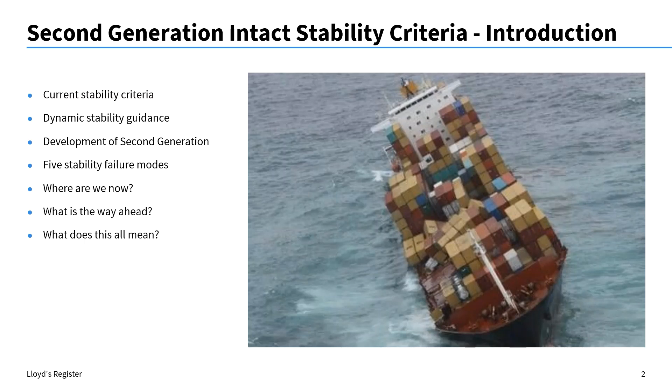The first generation stability criteria very much came from the historical development of stability criteria, starting with a gentleman called Rahola in the late 30s, then moving through the 60s to the development of the first set of defined stability criteria at the IMO. The principles of this first generation criteria, which we as naval architects and other engineers are all familiar with, are that the waterlines are level, there are no waves considered in the analysis, and because of that the vessel is static, giving an unchanging righting lever, or GZ curve, that we'll all be familiar with.

And then crucially, for a given loading condition, this means that the righting lever or GZ curve is singular - there is only one. If you would like more information about the historical development of the criteria at the IMO and the development of what is now the IS code, please take a look at the explanatory notes and references on the slide.

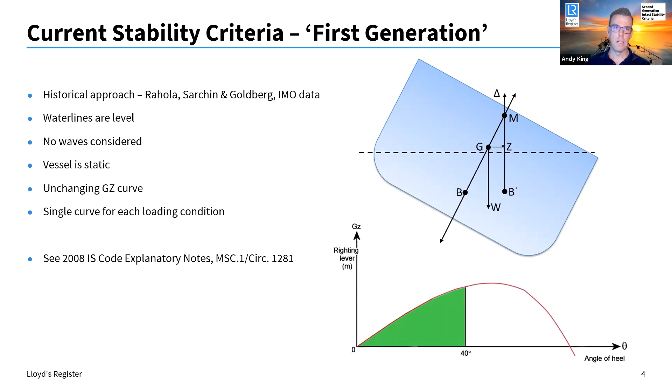Hopefully you haven't missed any content, but I've just summarised the historical development of the first generation criteria. Now, crucially, what is excluded from that criteria is any form of dynamic behaviour of the ship in waves - the variation of the righting lever that comes from a ship in waves - and what is given is only simple textual guidance. There is nothing more substantive in the stability information booklet or any other guidance to the master on the vessel other than what takes up maybe a chapter or two in that booklet.

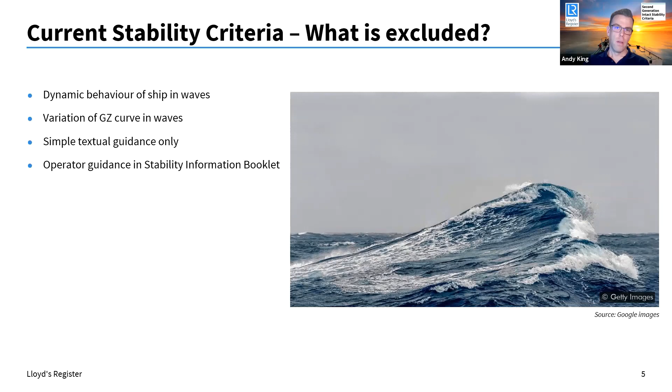The existing guidance can be found in Part A of the 2008 IS code, and it gives just precautionary provisions - some high-level textual awareness of these phenomena. It gives the ambition for performance-orientated criteria, but none are given. So there are simple headings for righting lever variation, resonant roll in a dead ship condition, broaching and other manoeuvring phenomena, but there is no substance to it, just a line that was written with the hope that those chapters would get filled in.

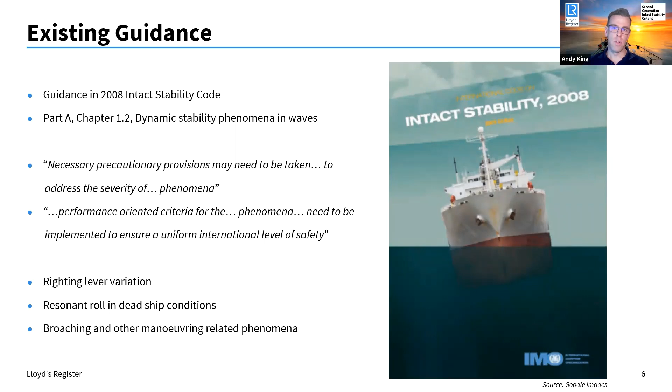Well, now they can with what is called the second generation stability criteria. So we've seen where it's come from over the last 70, 80 years, and now where we are with the state of the art of the next generation of what's to come.

So let's look now at how it's been developed. The work has been ongoing at the IMO for several years, and I heard anecdotally that it's been one of the longest running agenda items at the IMO. It's taken a substantial amount of work.

So over that time, the criteria have been developed, and there has been a large number of sample ships analysed, including a large variety of ship types. The draft criteria, as of now, have all been agreed, and we are currently undertaking the work that will finalise the explanatory notes. So a key point is that initially, this criteria will be non-mandatory.

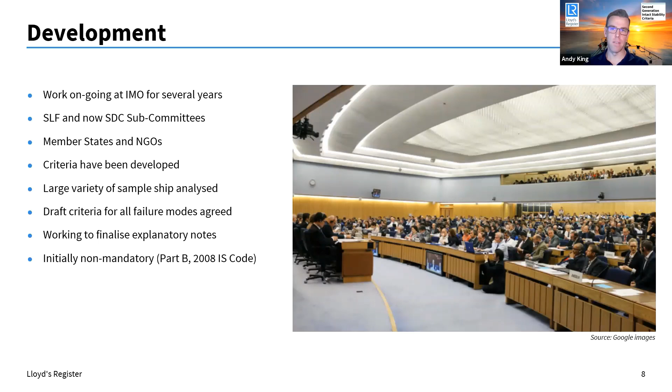In terms of who has contributed to the work, it has been taking place in an intact stability working group, expert group, and then intersessionally - and by that I mean between the annual meetings of the IMO, which is generally around February time. So intersessionally, there is a big correspondence group where the intact stability experts can debate and refine things by email and by phone.

The work, by its nature, has been highly academic, and this is because, as you might appreciate, we're trying to distill very dynamic stability phenomena into, in some cases, very simple binary pass-fail criteria. So on that basis, because of resource, computational ability, model testing ability, etc., it's been largely led by universities, and principally led by Japan, the United States, Italy, and Germany.

There's been valuable contributions from many other member states and NGOs, for example France, Sweden, IACS, and ITTC, to name many. And then the software development insights have largely come from the Finnish delegation, which has been most helpful. And then even other delegations, such as the UK, Norway, and others, have given practical views on implementation, on approval, on complexity, and contributing to that feedback process.

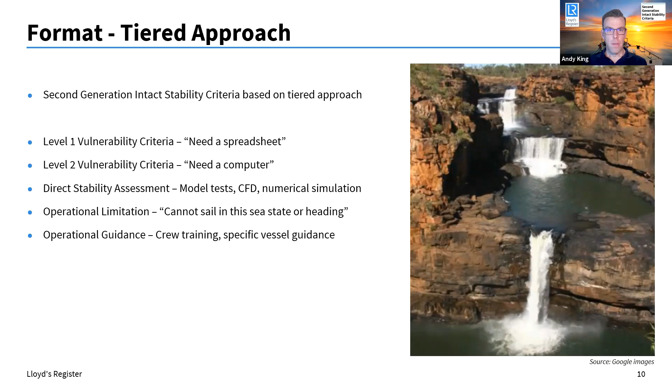If you are vulnerable, i.e. you don't comply, you move downwards to level 2, and downwards and so on as you pass or fail each mode. The key thing is, as a designer or as a consultant or whoever you may be, you can enter that left-hand side on any tier.

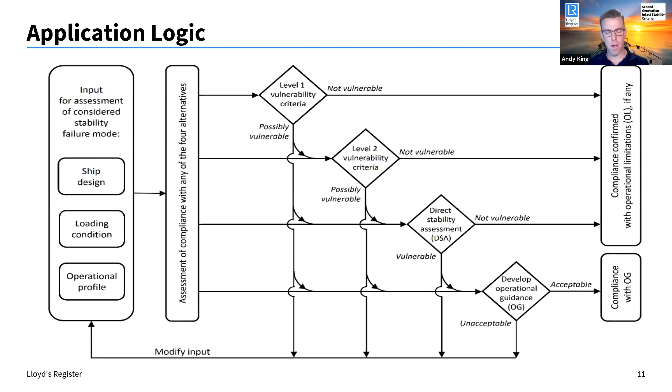If the vulnerability criteria are not complied with - very much prescriptive criteria, pass or fail - then you must move forward to the direct stability assessment method. This is largely a choice of model testing or numerical simulation, or a combination of both. It's key to say that it's much more complex, and much more resource and time intensive than doing the binary pass or fail checks in level 1 and level 2.

But the intention is very much to balance complexity against practicality, and the latest technology and software that's available. The safety level achieved by passing or failing at this stage is all about a defined average stability failure rate, and the numbers and background to that are in the regulations. In those, I should say, guidance is very much the requirements for how you do this work, the procedures you would go through, and how you would validate your work as well.

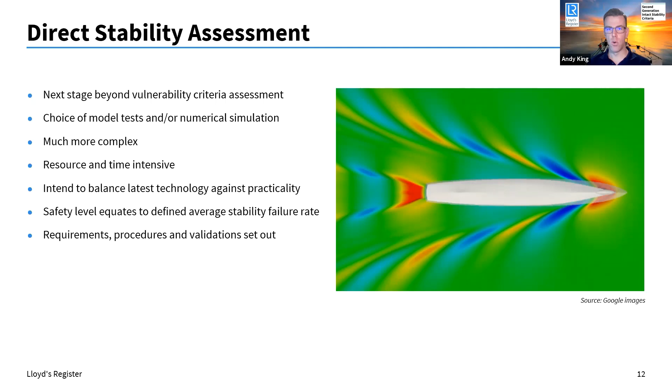If you did not comply with the direct stability assessment, having been through the entire process, and it was not possible to modify your ship or loading conditions, or any other parameters for compliance, you might then consider operational measures. As I mentioned, that is a blend of operational guidance and operational limitations.

Limitations limit the operation in a given loading condition. Operational guidance is a set of instructions for the master, such as speed and headings that need to be avoided. The limitations may be on areas, routes, or season, or significant wave heights that need to be avoided. But as you may appreciate, in real time on board the vessel, this requires detailed weather forecasting, wave information to be known, and careful consideration of how that is presented to the crew.

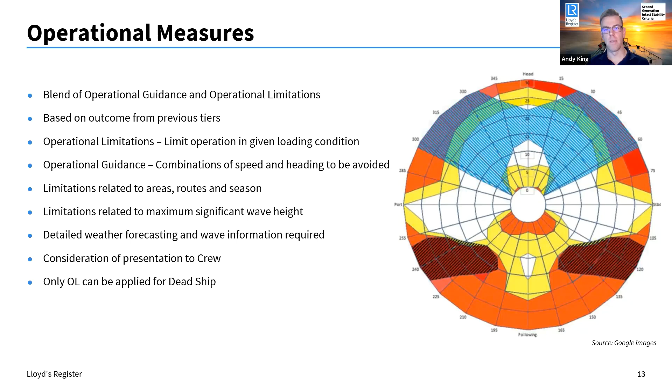Just one final point to note - when we come to the dead ship failure mode, which is about a vessel with no power, we can only apply operational limitations to such a case. When a ship has no power and loses steering and propulsion, then no amount of operational guidance in the first place may prevent a machinery failure from happening.

The substance of the criteria is considering 5 key stability failure modes: parametric roll, pure loss of stability, surf riding and broaching, dead ship condition, and excessive acceleration. We will look at each one in turn, what causes the phenomena to take place, and then where applicable, look for an example and a video of the phenomena in action.

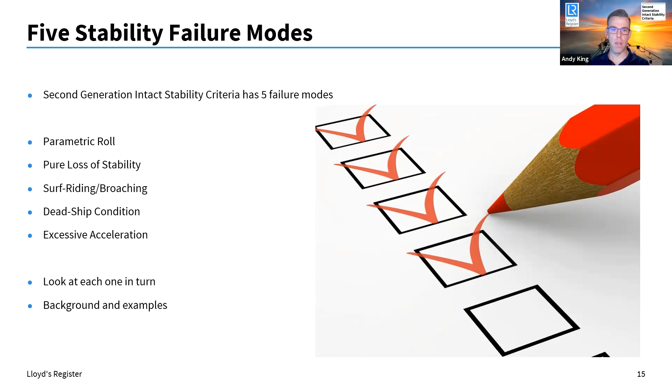Let's take the first one, parametric roll, and look at the background to it. It's caused by a variation in the righting lever, when the vessel cycles between being very stiff and very tender as waves pass along the vessel. It typically happens in following or quartering seas, when waves come from towards the bow or stern quarter, typically when the wavelength is approximately equal to the ship length, and when the encounter period is approximately equal to half the natural roll period of the vessel.

This phenomena, like many of them, is very sensitive to hull form and lines. Vessels that are very full in the mid-body and very fine at the ends, such as passenger ships and container ships, are particularly prone to this. You can see in the image a wave passing along the vessel, and in the plots below how the waterline - the red dotted line is the still waterline - but the light blue line is that waterline as it traces the wave trough and then the wave crest at amidships. As that wave passes, that crest goes up and down, causing the cyclical changing of the righting lever. These images are taken from the explanatory notes, so you'll see them in the regulations when they come out.

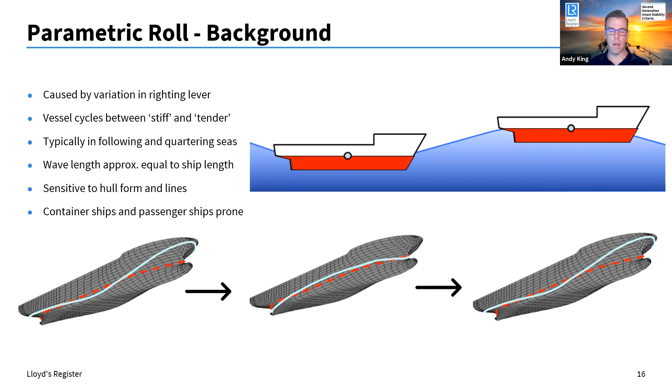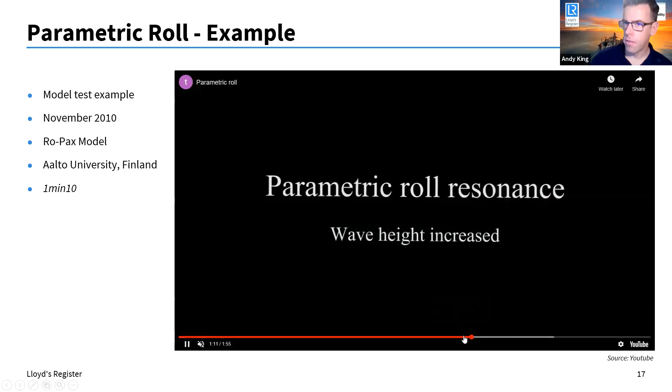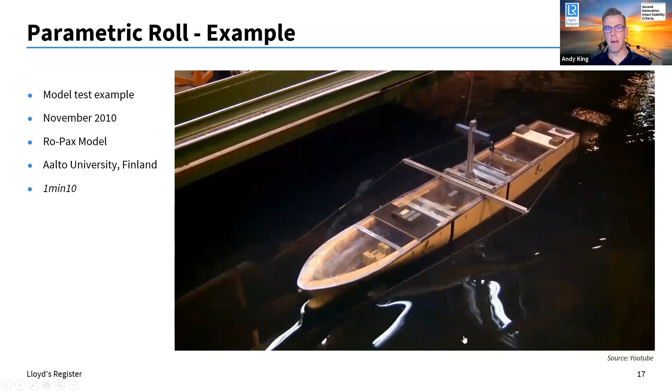Let's look at an example of parametric roll in motion. This is a model test - I'll jump forward and let us watch about 20 seconds of video, taken from YouTube, so it's publicly available, of a ro-pax model at Aalto University, Finland. You can see a very full mid-body, very fine bow and fine stern. As the head seas pass along the length of the vessel, the motion starts building up such that you get this natural roll building up that gets quite extreme towards the end. That is parametric roll in a model testing environment.

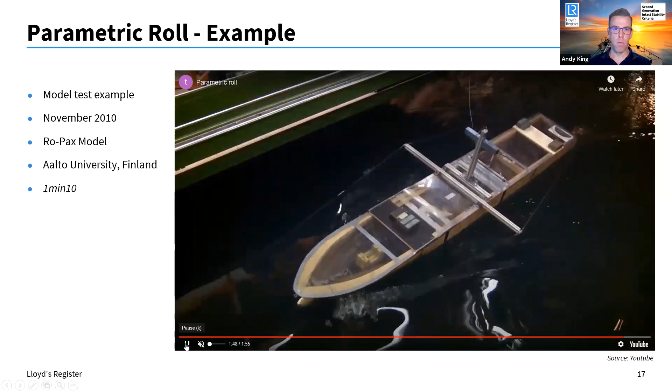In a real world scenario, we may look to a vessel called the Pacific Sun. It was built in the mid-80s, just under 200 meters long, and was LR class at the time. It's important to say that the loading condition the vessel was in complied fully with the normal, first generation intact, as well as damage criteria.

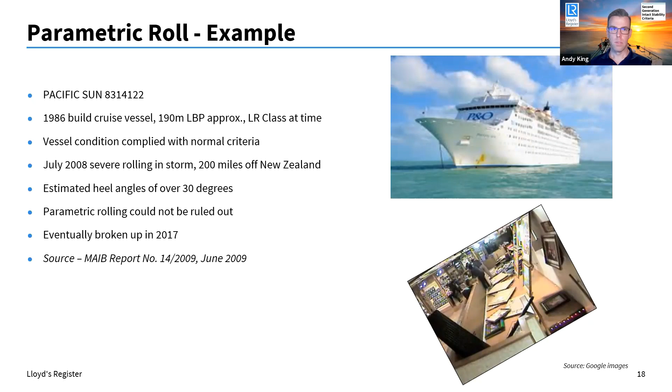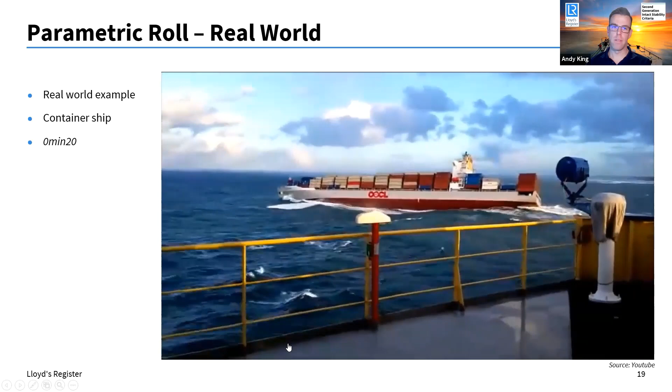Another real world example of parametric roll is this container ship, filmed from the bridge of another passing vessel. You can see very quickly the vessel starts building up some very large motions. It's worth remembering again, thinking about hull forms and lines - very fine fore and aft and very full in the mid-body. You can see the kind of heel angles being achieved in that situation.

As the vessel gets caught on a wave crest and sustained there, you may get a negative GM, and that's what can cause pure loss of stability, and in the worst case, a capsize scenario where all stability is lost.

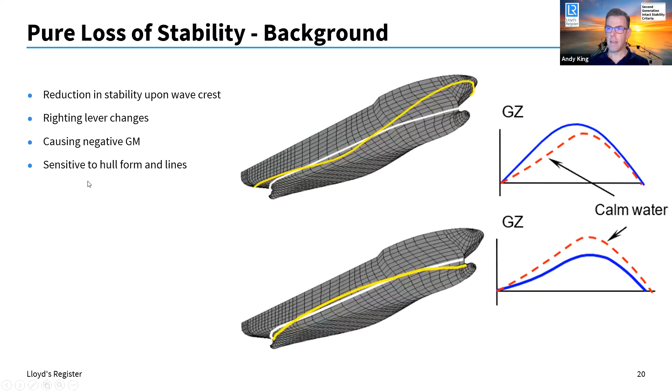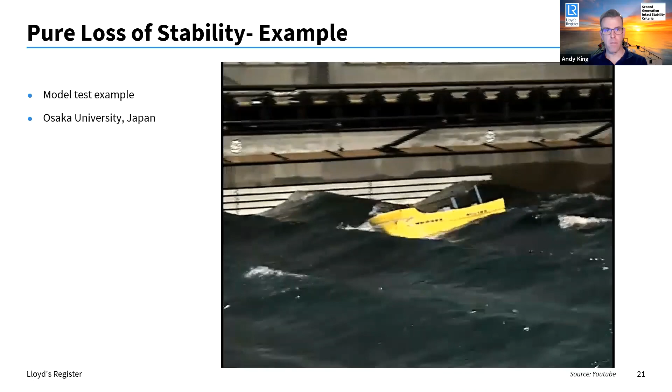Let's look at a model testing example filmed in Osaka, Japan, Osaka University being key because the professor there is the chair for this work. You can see the vessel gets caught on the wave crest, loses stability, and over she goes.

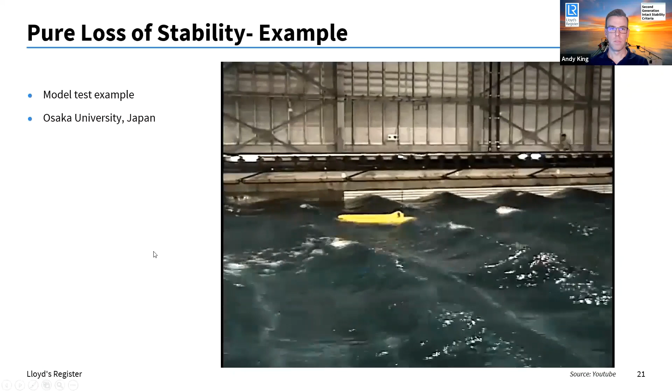A real-world example of this phenomena is the Ariake, a 1995 RoPax vessel, 150 meters in length. She experienced a single large stern quartering wave in bad weather, hitting exactly what was required for this phenomena: a wave length roughly equal to ship length, giving an initial 25-degree heel. She was then hit by a second wave, which with sustained heel angle gave rise to cargo shifting.

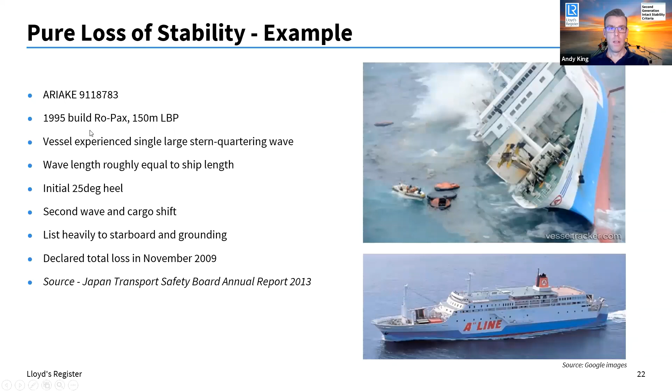The third failure mode is called surf riding and broaching. It's a highly dynamic event, subtly different to pure loss of stability. It gets initiated the same way, with a vessel caught on a wave, but then the vessel gets sustained on the downward face of the wave, such that it is essentially surfing with the wave, hence the first part of the name.

Then the broaching event happens, when the vessel becomes unstable in yaw. There is no control due to the flow direction on the rudder being reversed from the rotation within the wave, and then the vessel can broach sideways and lose stability and control.

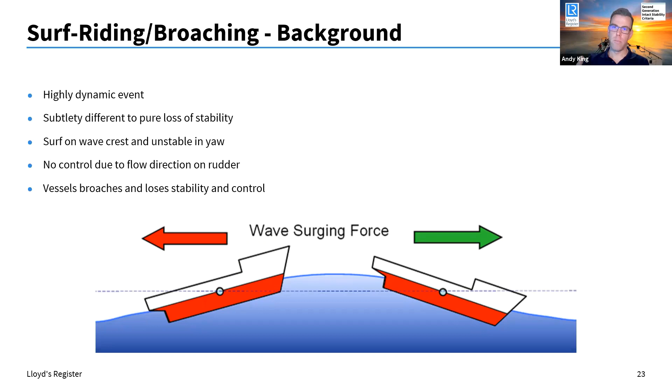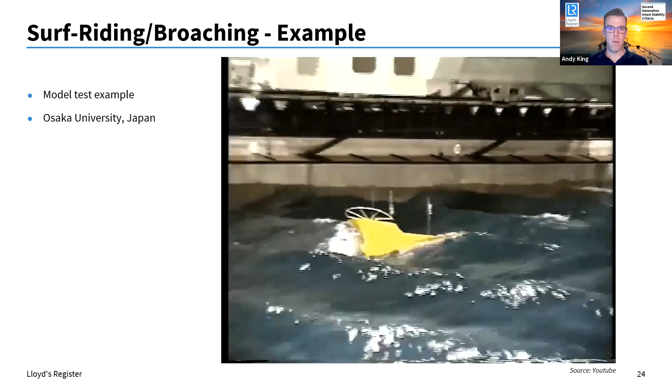To visualize this further, we'll look at the same model test, same hull form, same model. You'll see the vessel surfing with the wave, getting caught on that downward wave crest, and then it broaches, loses control, and turns over.

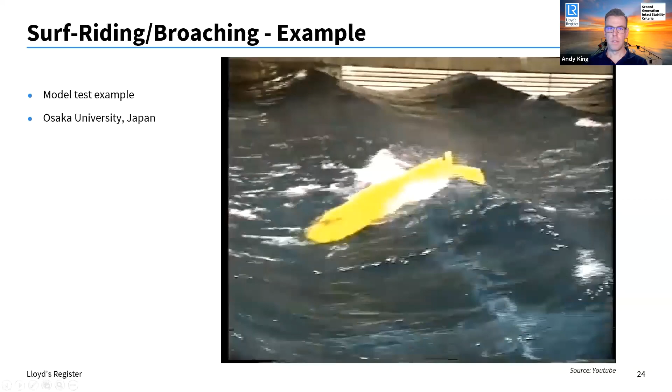The fourth failure mode is called the dead ship condition. It's the simplest to visualize, but one of the most difficult to model for the criteria. It's largely developed from the conventional wind criteria, and means, as the name suggests, the vessel has no propulsion and no steering, so it essentially turns beam on to the wind and waves and starts reacting to that wind and wave action.

It's important to state the work with the conventional wind criteria was so in-depth that it's my view it will eventually lead to a refinement, a development of what we think of as the conventional wind criteria. I do not have any examples of this, real or model testing.

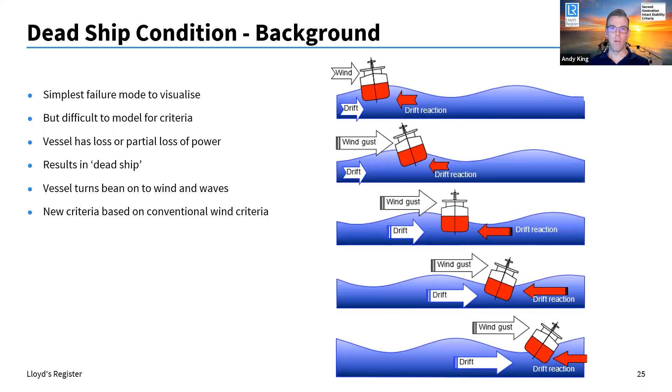We'll move on to the fifth and final failure mode, which is excessive acceleration. It's generally good to have a low center of gravity for stability reasons, but having a low VCG can make a ship very stiff, and that stiffness can give rise to very rapid accelerations.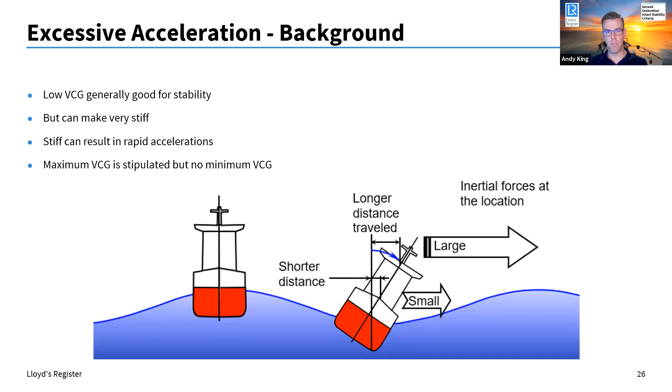A real world example of this phenomena was on board the Chicago Express, a very large container ship. It was GL class and German flagged, and that's important to state because in this case, the German delegation at the IMO was very much the driver behind the inclusion of this failure mode in the criteria.

She was just off Hong Kong when she was caught in heavy wind and swell, giving very high roll angles. She was hit by one single wave on the starboard side that gave a roll angle of 44 degrees. The vessel was in a ballast condition, and the motions were so extreme and so fast at the bridge level that everybody on the bridge, other than the helmsman, were knocked completely across the whole width of the bridge, unfortunately leading to one fatality.

The master was very seriously injured, and also 4 minor injuries. But just like we were saying, the vessel had a very large GM, a very low center of gravity. So again, it's about thinking about that window of operations where the VCG might sit. And again, you can find at the bottom the investigation report if you wish to find out more.

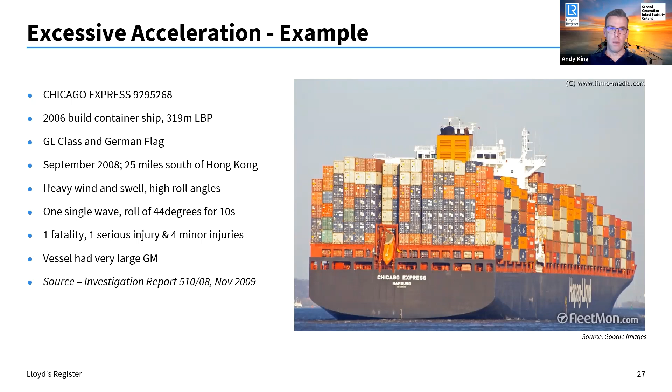So those are the 5 failure modes.

So let's think about where we are now and what's the way ahead with this criteria. The key point of this year, just before COVID hit us in February 2020, was that all the vulnerability criteria and all the draft guidelines for the criteria were agreed at IMO. That happened at SDC 7.

And then also the draft guidelines were agreed for direct stability assessment, as well as the operational measures to cover limitations and guidance. The current version, and it's important to say, in case you wish to have the regulatory text, is the reference there, SDC 7 Working Paper 6 from this year. That includes the most up-to-date set of criteria that will become the new circular.

The current correspondence group is now developing the explanatory notes, and that will be considered at SDC 8 next year for finalisation. The guidelines themselves are about 60 pages, while the explanatory notes currently run to over 300 pages. So you can grasp the complexity, the background, and the explanations that go into the criteria and the various levels.

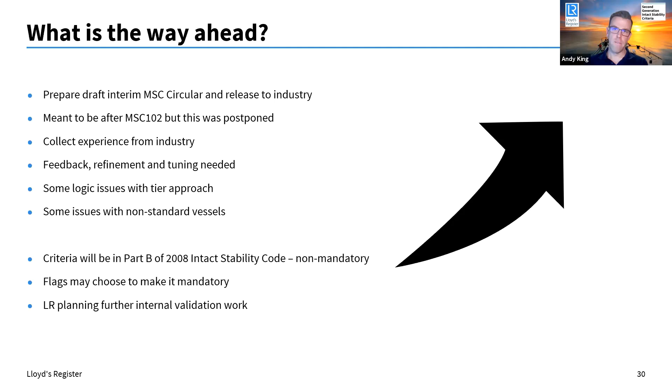Once it's all finalised, as I said, it will be in Part B of the 2008 IS Code, so it will be non-mandatory at this stage. But flags may choose to make it mandatory, or for a particular case, designers and owners may choose to seek compliance. So people like ourselves at Lloyd's, we are seeking to undertake further validation work to really prepare ourselves for when this lands.

So what does all this mean? What does it mean for class and flag first? Well, most importantly, it's a new criteria that needs to be applied.

So we need to work and increasingly get used to it. We need to work with the flags on behalf of them for application of it, if they choose to make it mandatory. Otherwise, we think it will potentially land on the desk at Lloyd's Register, for example, in 1 to 2 years.

But it is a very complex criteria to be understood, as well as a complex criteria to be modelled. So that needs, for class and flags and others, some work to be done on procedures for processing those calculations, and particularly for appraising things like direct stability assessment, operational limitations, operational guidance. There are some real practical considerations about how submissions on those items are received, appraised, and then ultimately approved.

For the wider industry, for yourselves joining this presentation, for naval architects, there is the awareness to be had, and as I said, a very complex criteria. The key point for designers is that it requires inputs that may be unknown, especially at the early design stages.

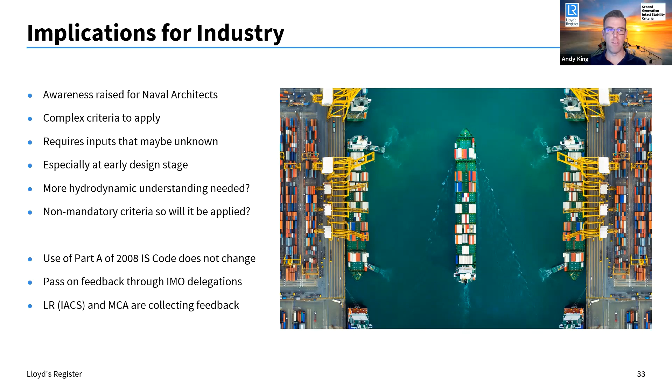For the crew, it definitely has some implications. The overall aim is to offer an increased safety level, but there are considerations to be had over the practicality of it. There will be increased training, awareness needed, but how is it monitored in real time?

It requires more detailed weather forecasting, more detailed knowledge and forecasting of wave heights, and then decision making based on that. So it will definitely have implications for onboard stability computers or information, such that there will definitely be a danger of differing, limiting VCG information.

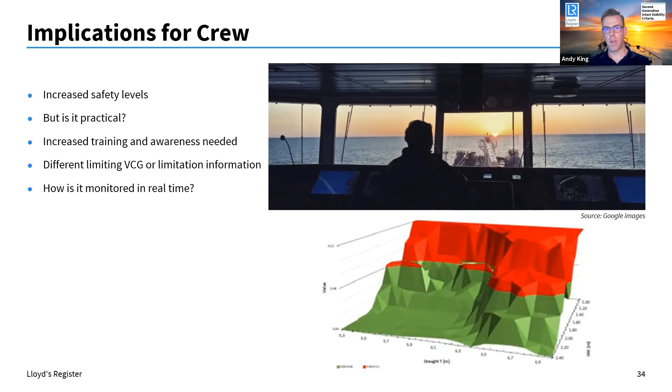So the vessel may have a particular loading and a particular KG height that has an island of non-compliance. And that's where the stability information and the passing on of that information to the crew will become much more important. Whether that's through the likes of computers or polar plots remains to be seen.

So some wider and final considerations for ship design in general. These phenomena that we've talked about are very much based on ship form, but it's also important to remember, for the instances that we talked about, there were largely other contributing factors.

But as designers and owners and operators, we should be thinking, if one level fails and if it's not met, then what? Do we move forward? Or as non-mandatory criteria, do we escape out of them and say we cannot comply? That's some questions and some conversations to be had.

But we should bear in mind that this criteria could become mandatory in future. So we very much need to consider the whole picture of what it means for ship design and compliance.

But some final thoughts from myself: are vessels suffering systemic intact stability issues? In my view, they are not. We don't have ships falling over for intact stability reasons. So the first generation criteria, the work that's been done for 70, 80 years, something in that is correct. But we would appreciate, by doing this work, by adding on additional criteria, we are offering an increased safety level for ship design.

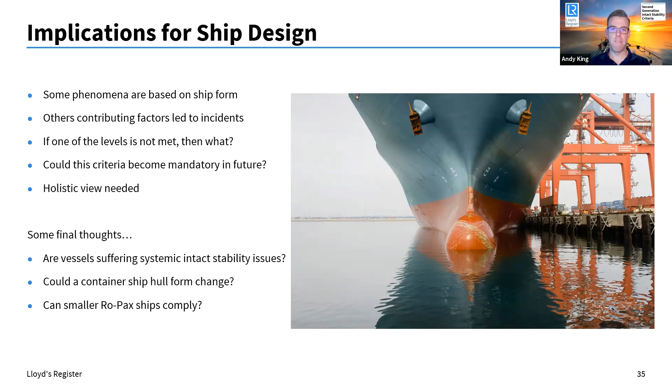As it becomes public domain and the criteria are released, any feedback you have, we'd be more than welcome to receive it.

So in summary for the presentation, I'd like to remind you, we've talked about where we've come from, the first generation criteria, how we have only very basic dynamic stability guidance in the stability booklets, but using all where we've come from, we are now developing and have finalised the second generation criteria. It is based on a tiered approach and considers 5 failure modes.

As soon as MSC 102 takes place at IMO, COVID allowing, then the expectation is it will get released as a draft interim circular. The explanatory notes will follow in 2021.

And then lastly, to take away is that this work, the new regulations, will have implications for all of us, be that class or flag, industry, crew, and ship design in general.

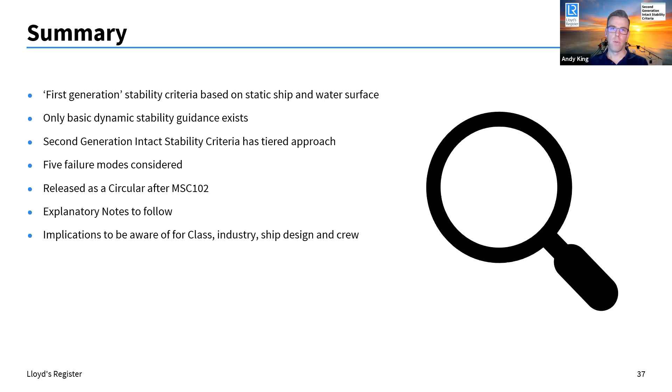Thank you, Andy, for a very interesting lecture. I thought it would mute there. Can everyone hear me now? I hope you can. Yeah, I can hear you. We can hear you. When I move on to questions, brilliant. I don't quite know why I thought that.

First question is, why are the new rules non-mandatory, discretionary initially? Sorry, Lizzie, could you repeat that? It broke up for a second. So the question is, why are these new requirements non-mandatory initially? Why not go straight for mandatory?

For 2 reasons. Firstly, they are seen as very much a set of criteria that need to be released, and we need to seek feedback on them to improve them. And then the second point is it's definitely known that they are not fully mature. So we talked about some of the logic issues, and it's certainly my personal view that we will be encountering far more issues making it mandatory when, in terms of development, they are still quite immature. I would say the potential for becoming mandatory certainly exists in the future, but we are a few years away from that.